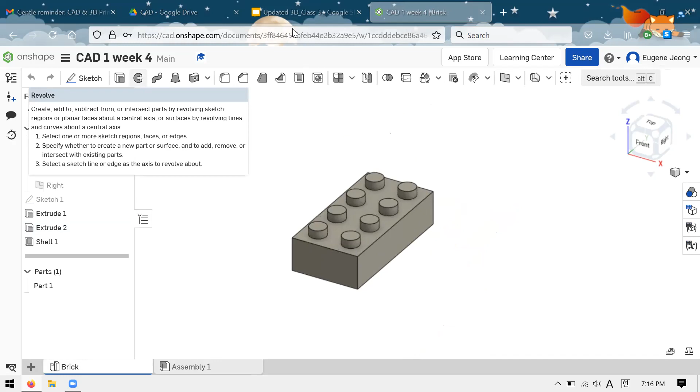All right, so in terms of last week, I think from what I remember, we went over the revolve tool. So that's the second one here. I think we'll be using it today, so when I get to that, I'll make sure to explain it pretty well.

The other thing was assemblies. We made this little brick together as a group demonstration, and we learned our first steps in making an assembly, including how to fasten things and fix your first part to the assembly space. The only thing we really touched on was the fasten mate. We'll also use that today, hopefully, depending on what we get through. So when we get to it, we'll get to it, and I'll make sure to take it slow.

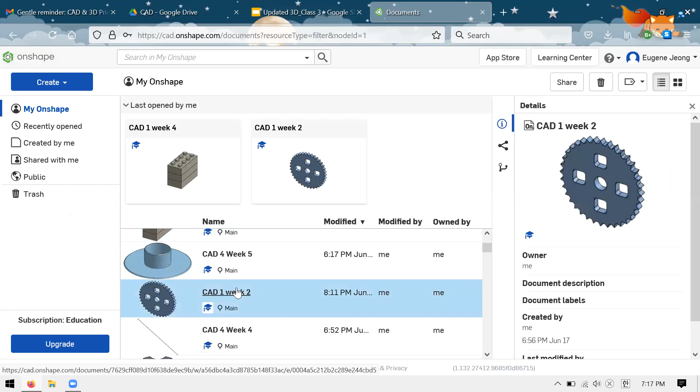Seems like this is everyone we're going to get, so let's get started. As I said last week, of these projects done in previous versions of this class, I believe this sprocket handle thing has been one of them, and quite conveniently, each of you hopefully have completed a sprocket from a previous week. So hopefully you still have this model. Let me know if you don't. I'm not really sure what you'd do without it, but we'll figure something out.

What I'll say is open up that Part Studio, that document where you had that sprocket made, and just start working. When we start doing stuff today, just create new Part Studios inside of this document, with the plus sign, create Part Studio, and make new parts all in this same place where the sprocket is. It'll make things a bit easier later on when we get to assembly, just to have the stuff we're assembling together in the same place.

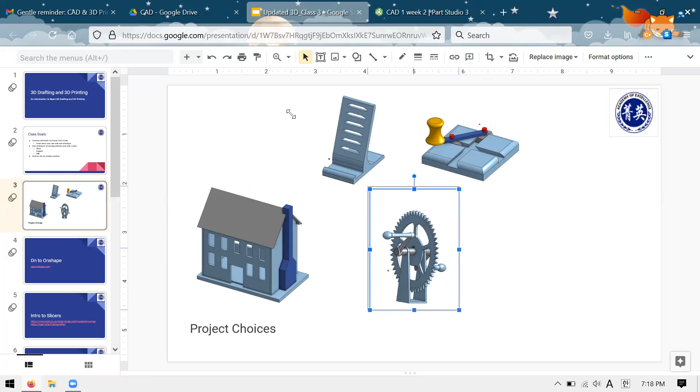All right, so hopefully you're all good now. So let's take a look at what the people who designed this sprocket stand were doing.

It's fine. Okay, so we just open a little text document here. I hope you can all see the notepad. In this case, we're not designing something entirely from scratch. We kind of have an idea of what we want, and that's a little stand for a sprocket with a handle that you can crank to turn the sprocket.

And our final goal is a model, something in the ballpark of this, where everything moves. You can click and drag on it to make it move, you can animate it, and that's kind of what we're working towards. So we know what we want, and so how do we get there?

So when we're modeling, we need to think about what we need to make. Every assembly is made up of parts, and so we know what parts we need. We can see them all here. I'll give you a second just to brainstorm what are the things we're going to have to design and model so that we can put it into an assembly.

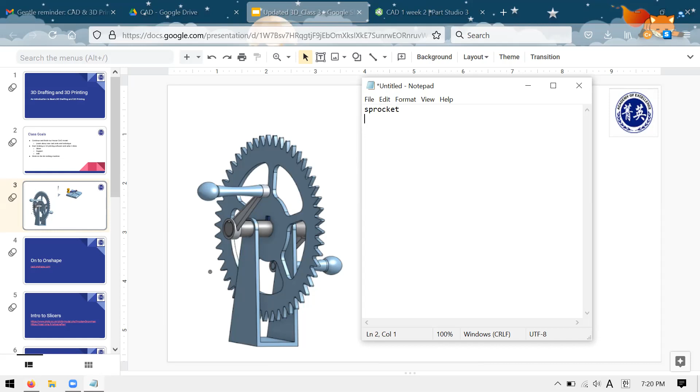So the first thing is the sprocket, so I'll just write that to begin with. What else do you see here? A spherish type thing—I might want you to be a bit more specific than that.

Which part are you referring to? The knob here? Okay, so like a handle, right? But you don't really hold onto that though. I guess it depends. But some kind of handle, I suppose, like a handle. Okay, what else do you see?

I see a stand kind of thing. Yeah, so this kind of U-shaped, the square thing that's supporting the sprocket, right? Yeah. Right. That's definitely there. Okay, what else do you see?

A cylinder that goes through the middle hole of the sprocket. Yeah, cylinder. We might call it an axle or a shaft or something along those lines. But we do need some probably cylindrical component that'll rotate and keep the sprocket on it.

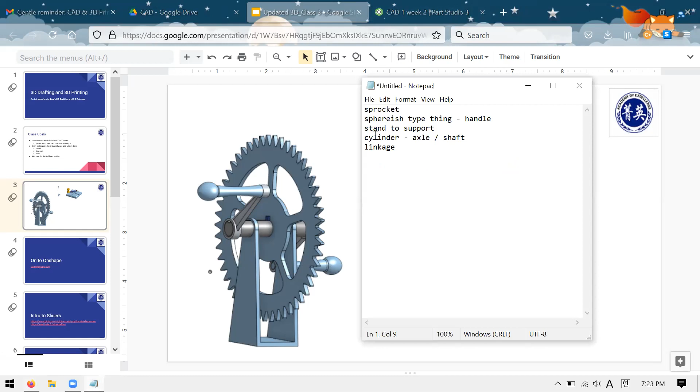So now we have a list of parts. We need perhaps 4 more things on top of the sprocket we already have. And so let's get started.

I'll start off by naming my part studio so I don't get confused. First one is the sprocket that we already have. Everyone already has. Next, I want an axle. How do you create a part studio?

Sorry, your voice cut out. How do you create a part studio? Right, so hopefully you're already inside of this document with your old sprocket in it. Yep. So in the bottom left corner, you'll see there's a plus sign. If you hover it, it says insert new element. And if you click on it, in the second group of items, the first option is to create a part studio. You can just click it and it'll take you there.

And to rename it, just right click on the tab in your bottom bar, and there's an option to rename it. So I'll go ahead and create all my part studios. Let's see, the stand, handle, and I want a linkage of some kind.

Before we start, as usual, I know I have an extra challenge for those of you who pick up things quickly and get bored. This time it won't be a different thing, it's just that I'll probably demonstrate a pretty simple version of each of these parts. If you want to increase the complexity, add some more details, you can see the linkage maybe - well, I thought it was pocketed, but that's just the lines on it. You might add some details there and so on. So that's what you can do.

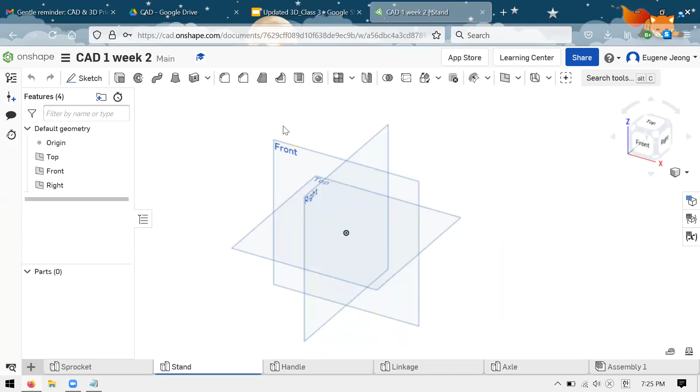If you really want to share your stand at the end of all this, I'll make some time at the end, but let's get started. So first things first, I need the stand, right?

I'll start off with the same question I asked before, like what shapes do you see, when you look at just the stand part that's holding up the axle? A triangle. Okay, someone says triangle. I'm imagining you refer to this part here, where it kind of tapers, yeah. So we do need to achieve that kind of taper somehow. And it's kind of a rectangle too. Yeah, when you look at it head on, like the upright parts here, you definitely see a rectangle going on.

And so given that, what would be a good way to start doing this? What 3D features might you use, of the ones we've learned, I suppose? Not too many: extrude, revolve, fillet, chamfer, shell.

No ideas. Wait, can a shell go through two sides? Like, can you shell both the front and the back? Yeah, so the shell can actually take multiple faces, which is pretty cool.

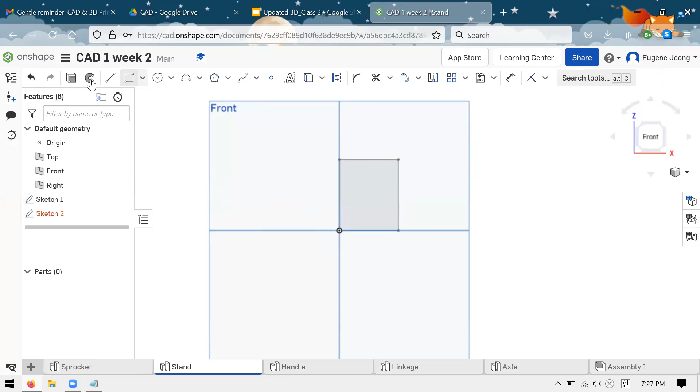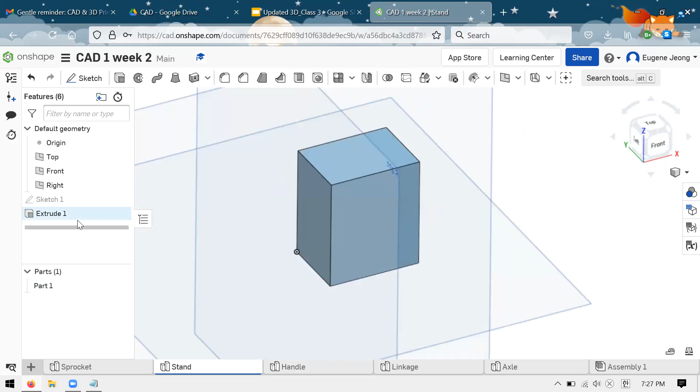So maybe that gives you an idea or two of something we can do. But I'm getting ahead of myself. So here's some ideas. As I go through these demos, you're free to try things on your own.

Try to make the thing beat me to it, if you will, or just follow along. Either way is fine. I'll start out by making a sketch, maybe in my front plane, and I'm going to start with this triangular shape someone suggested, this tapered face. My plan is to draw that in a sketch, extrude it out, and then maybe use a shell on this outer part just to make it hollow, and we'll see how it looks from there.

Start off with my line tool. I have a line, that's kind of the base, that's where the ground is.

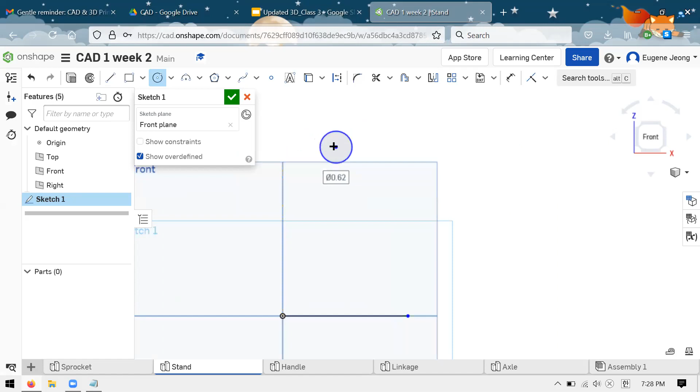I know I need a circle because that's where the axle goes through, and I probably want another circle, one for the inner diameter, one for the outer diameter. Then I'm going to have some lines, go something like that. Nothing's defined right now—everything's very unconstrained, underdefined, totally free to move, but the basic shape is there.

So now as we start to dimension things and define things, the question comes up: how big do I make it? Well, the answer to that is how big is my sprocket.

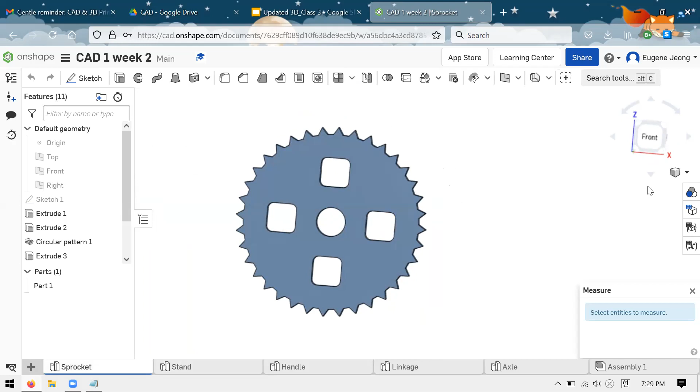I can go back here. If I want to find out how big something is, you can see in the bottom right there's a measure tool that looks like a tape measure. So I can do a simple point-to-point measurement like that, and it tells me the distance is 3 1/4 inches.

Another thing I could have done was just go into the sketch and look at the circles that I drew, and I can see that 3 1/4 inches is the maximum diameter of this thing.

So I need to make sure that my part will clear, right? I don't want the sprocket to be so big that it can't fit inside of the stand, and I don't want the stand to be so big that it looks silly. So I'll start off with the critical dimension that's relevant, which is kind of this one.

Again, if I ever do things too fast or you can't follow, just interrupt me, ask a question. I made a dimension like I've done before: I select the point that's the center of the circle, and I select this line, and I just drag it out to a vertical dimension.

The diameter of the sprocket was 3 1/4 inches, so maybe the total height can just be 2 inches and it'll look okay. It says on mine, 'an entity cannot be dimensioned to itself.'

So what you probably did was click the same thing twice. If I click something like that, you can see I get that error message. What I'd recommend is just deselect your tool, reselect it, try again. You have to be pretty careful with where you click, just because it can be finicky like that.

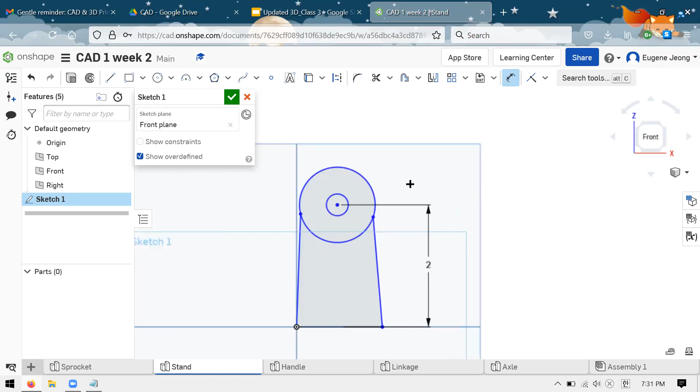Remember that your sprocket might be a completely different size than mine, so just measure yours, take a look at how big it is, and adjust your dimensions accordingly. Make something up—I'm not making a standardized, one-and-only stand here.

Next thing is I'm going to have this hole for the axle. So how big do I make that hole? Well, the sprocket already has a hole, so they should probably be the same size, just so the same axle can go through both of them.

Using the same process, I'll use my measuring tool. I can just select that face to measure it. I see that it's 1/2 inch in diameter. You should probably measure yours and see what your dimension should be.

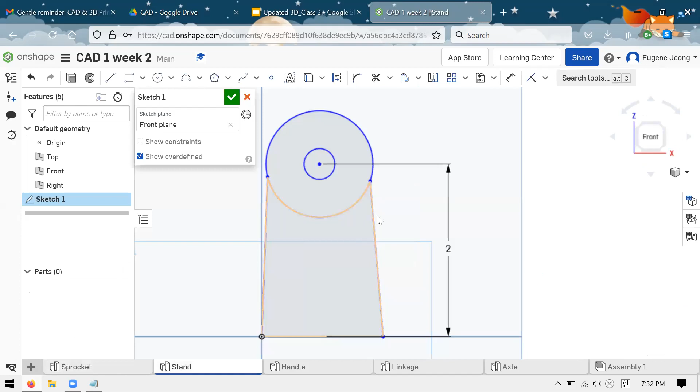Seems to be a bit of a thunderstorm where I am, so hopefully I don't have any problems with the internet.

So there's my dimension. If I think about what I'm doing here, those are pretty much the only critical dimensions. Everything else is free to be whatever I want, so I can do whatever I want now.

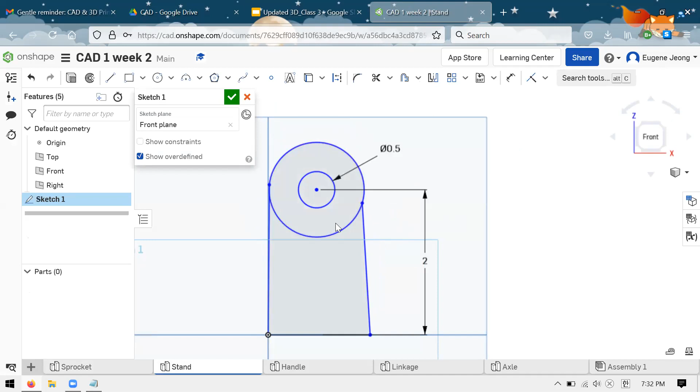As I start trying to dimension my sketch and fully define it, remember that my objective is to turn all of these blue entities, all these blue lines and such, black. A good way to figure out what's wrong, what I need to change, is to drag the blue things around and see what's still changing.

One of the first things I noticed is that this outer circle, the one I've highlighted, its size isn't fixed. So I can take care of that pretty quickly just by adding a number.

Okay, everything's still blue, so I'll drag some more blue stuff around and see what happens. I can see that the position of the center of the circle is not dimensioned yet. So I'll do that again with the dimension tool. I click a point, move my mouse over so that I get the dimension that I want.

Wonder what would look good. 0.75 maybe. Why not? We can change it later. You can see just like that, a lot of things turn black because these circles, now their sizes and their locations have been fully defined. So they turn black.

So what's left? I see these points are still blue. Let's see what freedom they still have. I can drag them around and you can see they can still move around the circle.

Well, what's my objective here? I kind of want the stand, yeah. I define the circles, but they're still not black. Are their positions defined? Yeah. Both horizontally and vertically? Oh, I forgot one. So whenever you run into that, try dragging the blue points around, and if it moves, it'll tell you kind of what's up.

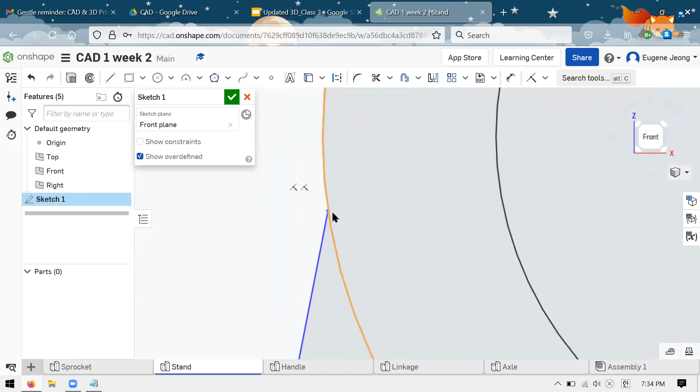My design intent here maybe is to have a smooth stand. So I don't want this sharp corner where the straight part turns into the round part. I kind of want a smooth transition. For that, I'll use my tangent constraint, and that just takes an arc and a line.

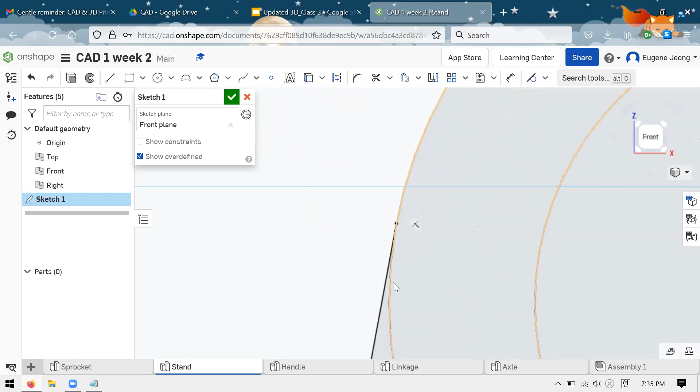You can see just by doing that, now it's a smooth transition. The straight line and the arc blend together. So that's good.

And I'm still not done. One more blue line. So let's try moving it around. I can see that the width of my base is not defined anymore. There's a few ways I can go about this too.

One thing I can do is just add a dimension to this bottom here, and that'll finish it. Another thing, maybe I don't want to think about what number I have to type there. My intent here is kind of to make this symmetrical when I look at it this way, right? For the left and right, I want it to be even.

So another thing I can do is just add a constraint. It can be an equal constraint and just make these two lines equal. Having done that, you can see everything is dimensioned, everything is defined. I'm pretty much done.

So I'll pause for a moment here just to see if you have any questions. I still can't get two lines to become black.

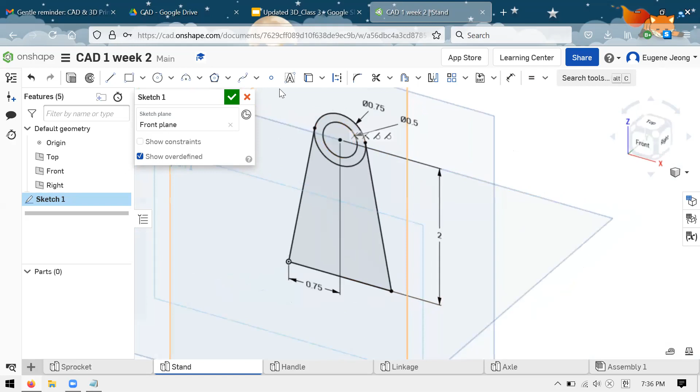Right, I see. Someone said something about the two lines. For those, it kind of depends on what you do. In my case, what I did was I created a tangent between the line and the circle, and I made the two lines equal to each other. Geometrically, that's enough to fully define it. I guess if you still have blue things, try dragging the blue things around and seeing what happens.

Someone's asking about the equal constraint, so I'll just show that again. I started out with the tangent one, just because my intent is for this junction to be smooth. The way tangent works is I select the tool, I select a circular arc, like a circle, and I select a line. So I select two things, this and this.

Then for the equal constraint, I select that, and I select two things that I want to be equal. So what I did there, I clicked the equal constraint, I clicked one of these lines, and I clicked the other line. If you still have a question, please ask again.

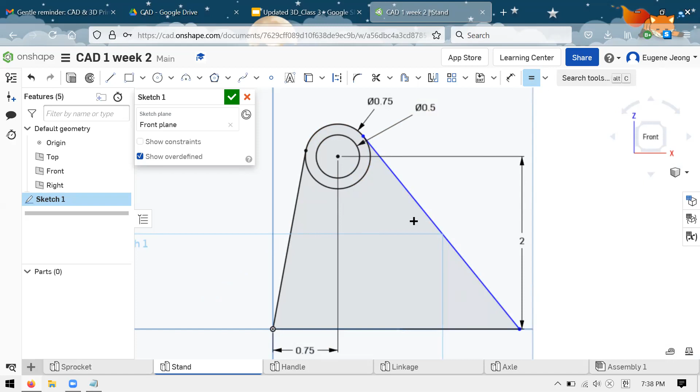So let's say I'm in a situation like this where my lines are not equal. I can select the tool, select a line, and select another line. So just select two things and that's how it goes. Can't get the equal to work.

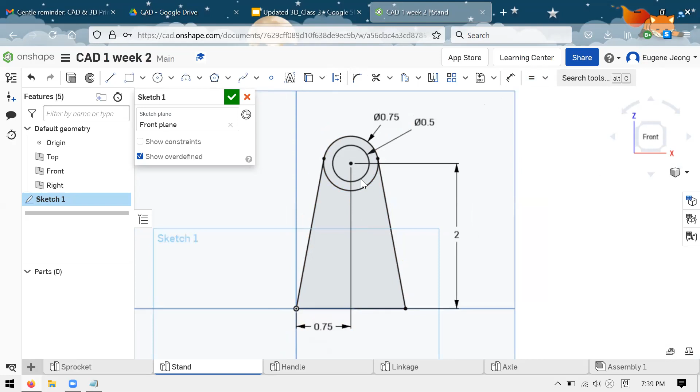I'd say drag things around, try to see if you can figure it out. I have a lot of faith that you're able to figure it out. For the moment, if you have a shape like this that's extrudable, just go ahead with the demo, just extrude it while it's still blue. And later on, when we take a pause, I can ask you to screen share.

And in the meantime, if you figure it out, that's great. So hopefully everyone has at least a shape, something like this, whether or not it's fully defined yet.

At this point, I'll resolve my sketch and I'll have my profile. So next thing I want to do is extrude it.

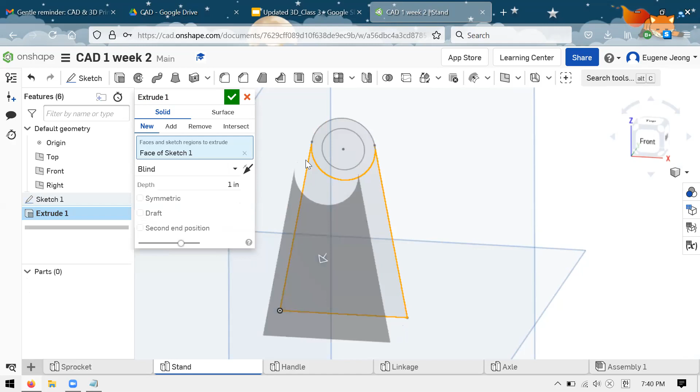So we've done this many times now. You select regions. In my case, due to the way that I made my sketch, I have kind of two regions that I want. I have this sort of trapezoid of sorts, and I have this.

So I select the regions I want. This is what I want as my shape. As for how deep to extrude it.

Again, I can see there is not much clearance issue there. It just needs to be thicker than the sprocket. So just to check how thick my sprocket is, it's 1/4 inch.

The entire thickness of the material of the stand and the sprocket thickness, and maybe a bit extra, is what I need. So perhaps I want like a 1/4 inch thick stand. In that case, it needs to be at least 3/4 of an inch. So I'll just round that up to an inch.

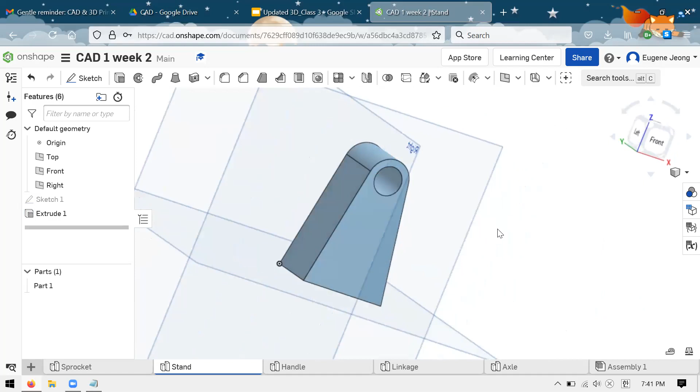So I have shaped something like this. Hopefully that part wasn't too bad. And the last thing I'll do is to cut away the middle part so that there's space for the sprocket to go inside. And so someone earlier suggested using the shell tool, which I believe we covered last week.

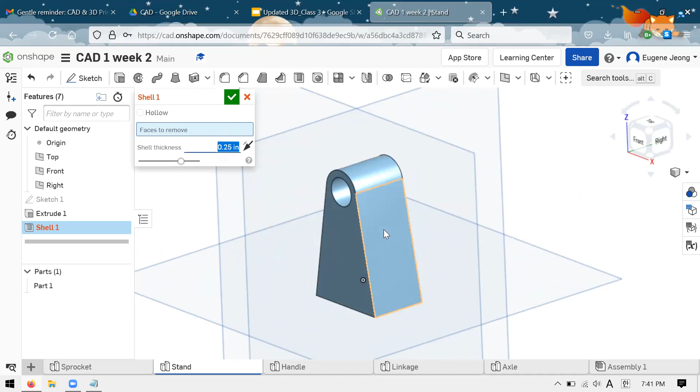And so for the thickness, in my mind, I was thinking a 1/4 inch. It's the same thickness as the sprocket. And for the faces, I'll just select...

And now you can see something unexpected happens. I thought it would just open up like this, but when you think about it, this hole actually creates another restriction where you can't actually break into that without breaking into the wall, which is how the shell tool works.

And so that's a pretty simple fix. All I have to do is go back into my extrusion.

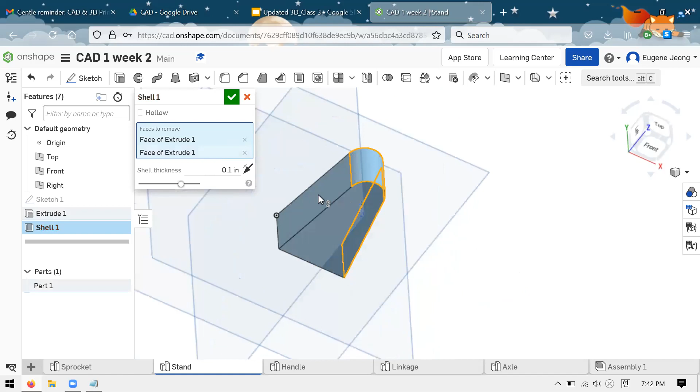And I actually want to also extrude this part. And now that that hole is out of the way, hopefully it'll just let me shell like that. And it does, so that's great. I'll bump the thickness up to 1/4 inch again.

And I can put the hole back in just by doing another extrusion. So to do that, I'll reveal the sketch using the eye, which we've talked about. And I can create an extrusion, select this circle, change the type from add to remove.

So I don't remember if we've shown this explicitly. I think we have for the sprocket. So you should be familiar with that. And just to be safe, I'll make it through all.

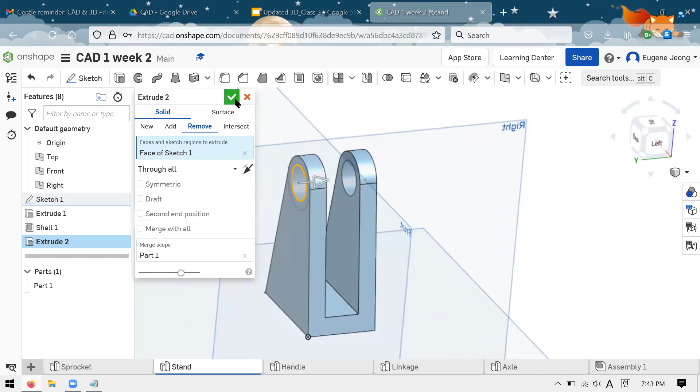How did I extrude the hole? So are you able to see your sketch that you drew that has that circle in it? I know someone before had a problem where they were looking at it through the part, so it looked like these dashed lines. So you might not be able to select it if you do that, but turn it around so that you see solid lines on your sketch and not like the dashed lines.

Then you get your extrude tool. You want to change the second bar here from new or add to remove. So you need to have this set to remove. You select the circle. You can see by default, it kind of tries to go into the positive direction.

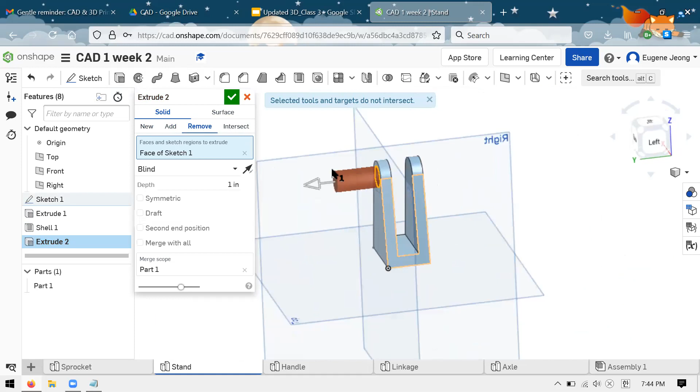So I'll flip it using this arrow, the opposite direction arrow. And by default, it happens to pass through the whole thing, but this is, I guess, optional. I'll change it to like something like up to next or through all.

And that's just in case I update it later to be even wider. So hopefully that worked. If that worked, please let me know.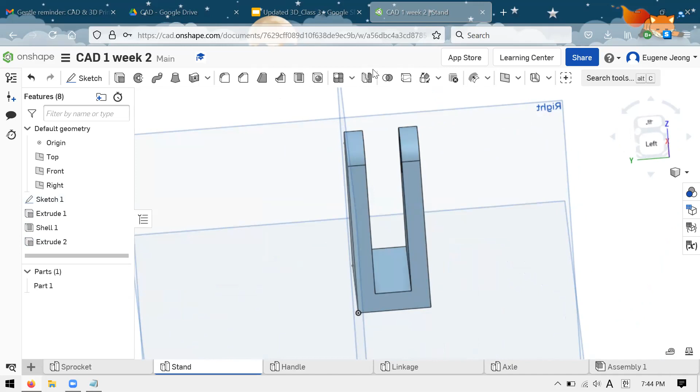I'll hide my sketch again. So for those of you who weren't able to create this first sketch and fully dimension it, I guess right now I'll quickly take a look. Whoever it was, share your screen please, if you still have the problem. If you don't, also let me know. Great, I believed in you all along.

So this is our stand pretty much done now. Looking at it now, it does seem a bit thick, so maybe I'll change the shell to be a bit thinner. Maybe I like that a bit better in terms of proportions, and I can always change it thanks to our parametric modeling. So that's the stand.

Next, let's go for maybe something more interesting, the handle. Someone referred to this as the sphere thing. We do want to have this kind of interesting shape, right? It's pretty cool geometry. You see this in real life with crank handles, maybe on a lathe or similar application. We want those ergonomics, right? So someone referred to this as like a sphere thing.

So what features might you use to try to create this handle shape? Which of these tools would be well suited to create it?

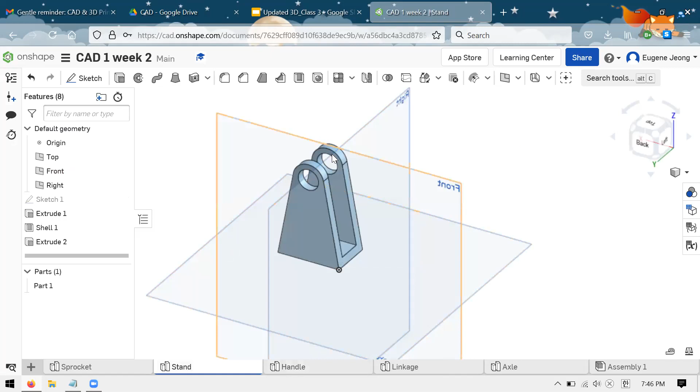One more question about the stand. How did you get the holes in? I tried to do the extrude, but it didn't work. Are you talking about these holes?

Yeah, so if you're doing the extrude cut, common things that might be happening: make sure you change this option to remove, make sure the direction of the extrusion is correct, so it actually goes through the part rather than into nowhere. And make sure the extent is far enough. Through all will pretty much always work. If it's blind, maybe it's too short, you might not see anything if you do something like that. So make sure it's through all. Merge scope should be part 1, that should be selected by default. Okay, did that work?

Great. So would you like to answer my question on how you would create this handle? I guess you were not here when we talked about a tool that would be very helpful for this. Well, I see next on my Zoom interface there is Tony. Would you like to volunteer?

What would you use to make this handle?

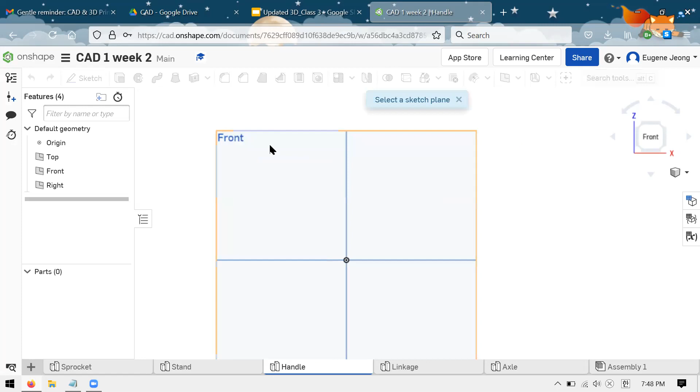Revolve, maybe. Great, what a great answer, that is my exact thought. And someone says fillet, and that'll also come into play. It's a very satisfying, very smooth shape, so that should be fun to make.

So I'll start off maybe with a circle. I know at the beginning someone called it like a sphere thing, so what better way to start than a circle. I'll draw something just like that.

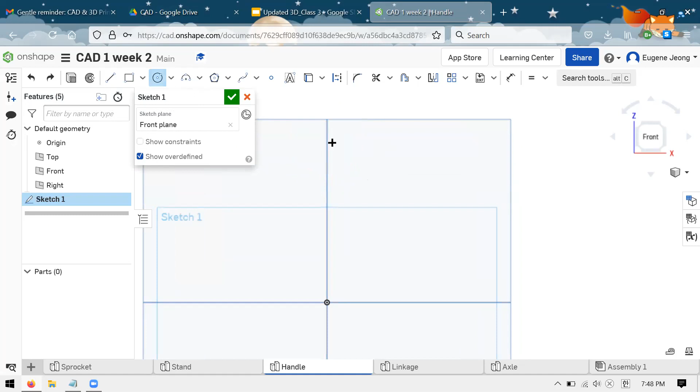Maybe that was a bit quick, but what I do by habit is just hover over so I get my constraints. You can see the vertical thing shows up and the origin highlights when I hover.

But also I'm going to need an axis of revolution, so I might as well make that too. I want a vertical line, that'll be my revolution axis. And I want a circle.

To be kind of the tip of my handle. And then let's look what we have here. It's very interesting, kind of tapers towards the middle and then comes out on both ends. So at the base, I can imagine I kind of need a bit of material there, maybe between these two.

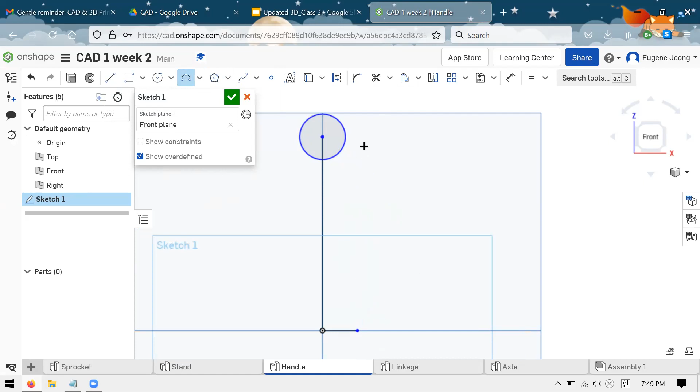I might try to use this arc tool. I think I showed this in one of the first classes, but we may not have had the occasion to use it, so now we do. You can also use any of these types of arcs, but I'll go with the 3-point arc. The way the 3-point arc works is you select a starting point, you select an ending point. You can see I missed my ending point.

So I'll try again, and I pick a 3rd point that's on the arc. I'll just click somewhere in the middle. You can see this is kind of the shape that I've got going.

And with this, I'll just start dimensioning, keeping in mind that my whole sprocket is 3¼ inches in diameter. Maybe a nice proportioned length for this would be, say, like an inch. So I'll just go through, do the same thing I used before.

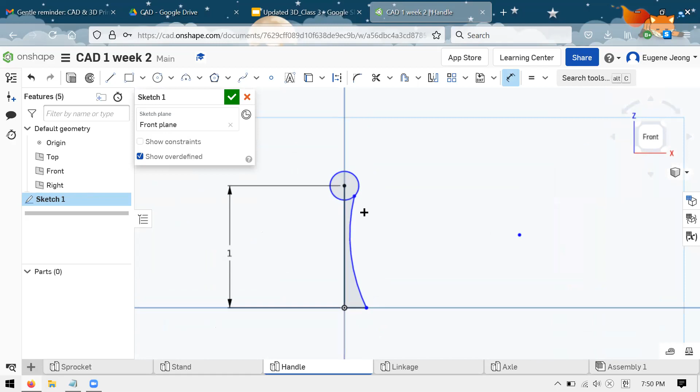That same issue where this arc naturally tends to just create a sharp angle. So to get rid of that, I'll use my tangent constraint again. And surprise, it also works with 2 circular arcs. Very convenient.

You can see it's still blue. Let's see what's wrong. I can see it's kind of the radius of the curvature that's not defined. So I'll just select that arc as my dimension. And you can see, having done that, everything turns black.

So a couple of tools that we haven't used much, but hopefully still straightforward. Once you're there, resolve the sketch. If you're not quite done, but you have the general shape, it's fine to just leave it underdefined for now. And you can always go back and think about it.

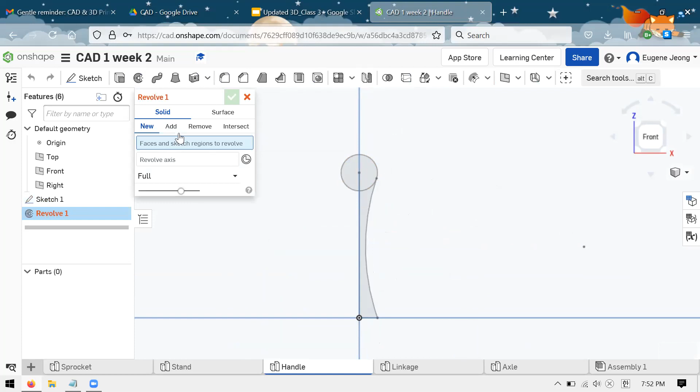So this is the new tool that we talked about last week, for those of you who were absent. It's called Revolve, and you'll see what it does when I do it. But it needs 2 inputs, essentially. One is the region to revolve, similar to the extrude, where you're selecting an area that you sketched out. The second thing is the revolve axis. What the revolve does is it sweeps a profile about a line. And hopefully it works.

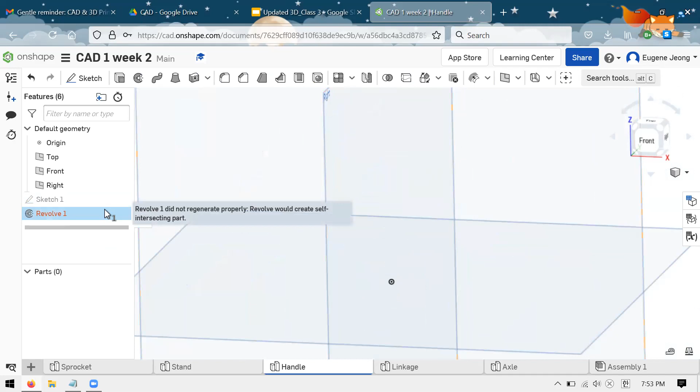Unfortunately, it does not work. And I expect that's probably because the profile kind of goes through itself. Yeah, that's what it's saying. So as usual, we're gonna have to make some changes on the fly. This should be a pretty easy fix though. Since the profile would have been self-intersecting, all I have to do is close off this profile. You can imagine what Onshape might not have liked is, as it was trying to generate this model, it had this other half of the sphere that it was kind of trying to push through itself. So all I did was add this segment here, which will close this out, make it a separate profile.

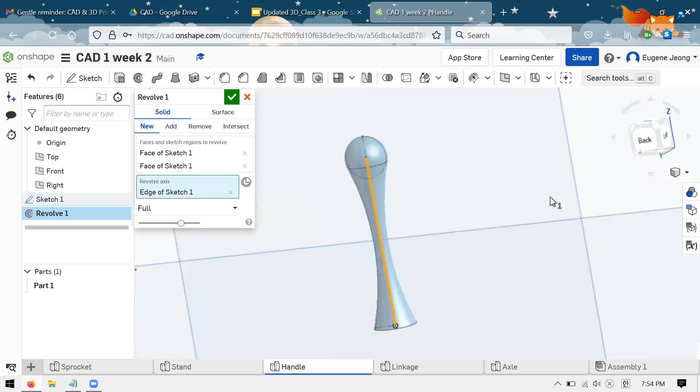And hopefully with that, Onshape will allow me to do what I want. There we go. So thankfully, now we're good. And for those of you who are seeing Revolve for the first time, hopefully this gives you an idea of what it does. You take a profile and you spin it around, and the enclosed area, the enclosed volume is what becomes your part. So you can still see my sketch in the middle there. It kind of just sweeps around. And there you go, that's my handle. It's a bit thin towards the middle there.

If I don't like that. Can you show me how to do it again? I didn't get that. Yeah, the Revolve tool.

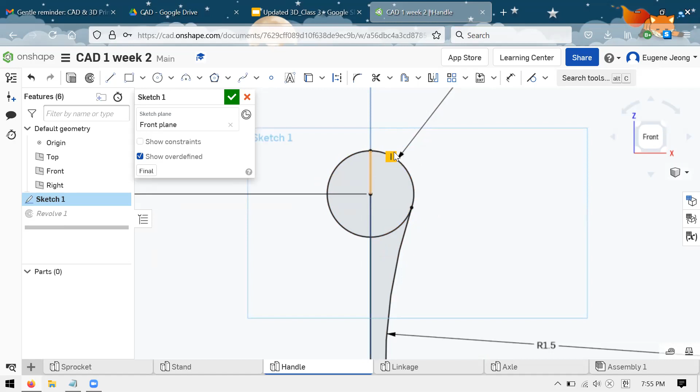So make sure you partition your sketch, I mean, like with the circle. Your voice cuts out, but I'm gonna guess you're talking about the sketch. Yeah, all I did was add a line. So from here to here, I closed off half of the profile by drawing a line, a vertical line to be clear. It has to be vertical, and they'll close off your profile. And unfortunately, Onshape forgot that I wanted that profile. Just remind it. But there you go.

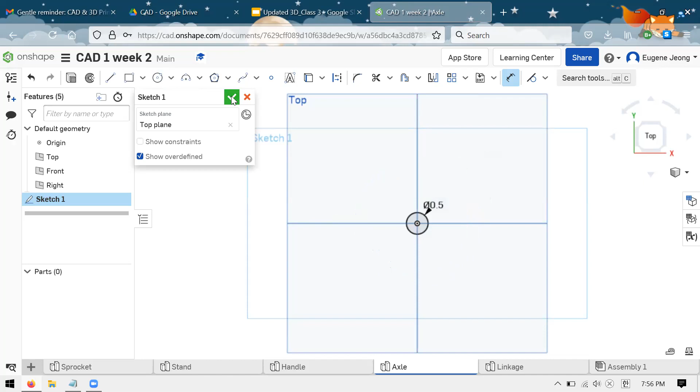So the next thing we're going to need, I think, would make sense, is the axle. This should hopefully be extremely fast. As someone pointed out, it's just a cylinder. So all we need to know is the diameter here, which I've already measured. It's 0.5 for me. So I'm just going to make a cylinder, which you may all be familiar with. I draw a circle, give it a dimension, and I extrude it.

And how long should I make this thing? Well, let me go back to my stand. How wide is the stand? From here to here, Onshape says it is 1 inch. So I do want it to be a bit longer than that, to come out a bit. Maybe I'll make it 1 3/4.

Maybe even 2 inches. But the axle should be very straightforward.

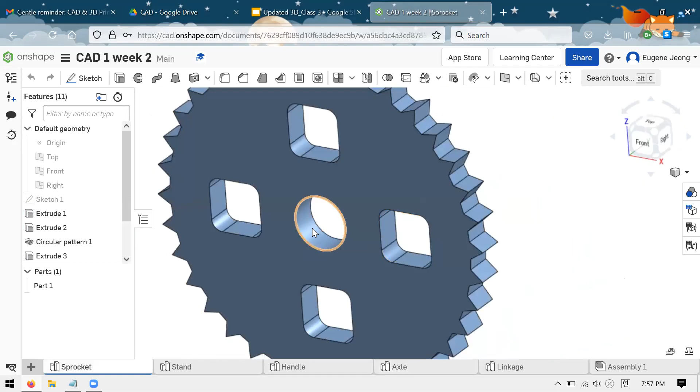These circles for the axle should be the same diameter as the inside of your sprocket, so it fits nicely inside. In my case this was 1/2 inch, but yours might be different.

All right, last part. Let's see if we can get through this in class.

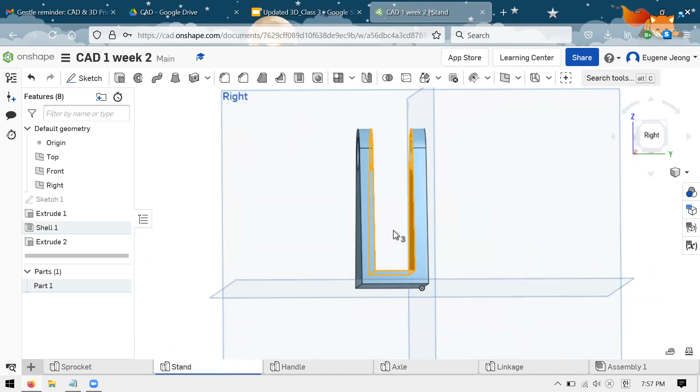Wait, I have a question about the stand. Sure. So on my stand, where the sprocket should go, there's something blocking it, like the two circles at the top, there's like a cylinder thing. Okay, I think that's the problem I ran into as well.

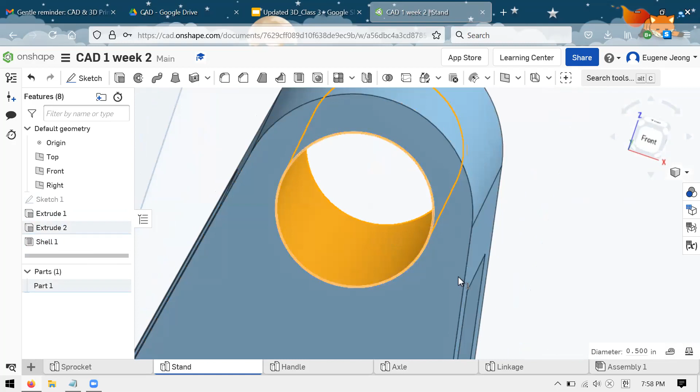To explain what's happening, I think something like this is what you mean. Yeah, I tried shelling the top but it didn't work. The way the shell tool works is it digs into the material until it reaches a minimum wall thickness, then does whatever it can to preserve that. So if you have the hole first, OnShape needs to preserve a wall thickness relative to that hole, meaning it has to preserve wall thickness even at the bottom, so it won't shell that.

The way to get around that is in your first extrusion, also extrude that hole out so it's a solid block. Then you shell it, and since the holes aren't there, it'll let you shell the whole thing out. Then you can extrude the hole again using what you probably already know how to do.

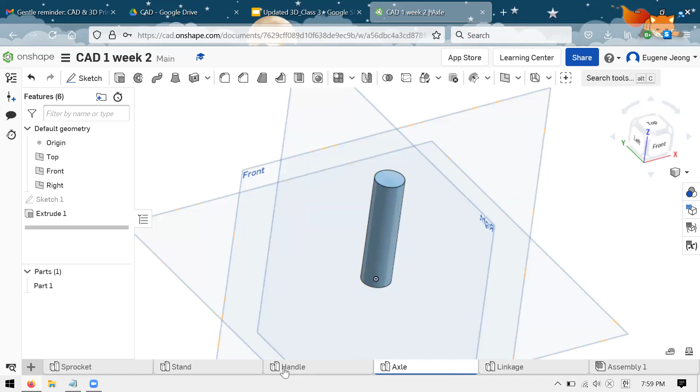See the chat. When I did the revolve, your thing disappeared. That probably means it hasn't resolved, so it'll fail, it'll turn red when you try to click the check mark. Did you make sure you did not select the self-intersecting region?

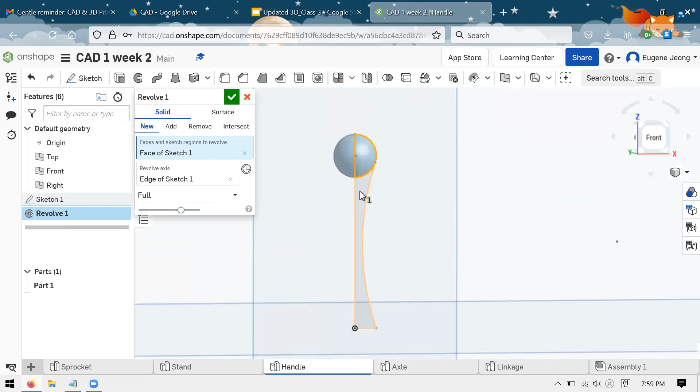For the revolve, make sure you're just selecting half of it. So don't select this, don't select that one, but only select these two.

For the stand, you can't extrude the empty hole. Are you talking about the axle? I'm guessing. Common issues could be: make sure it's set to remove, and make sure you're clicking the sketch from the correct side.

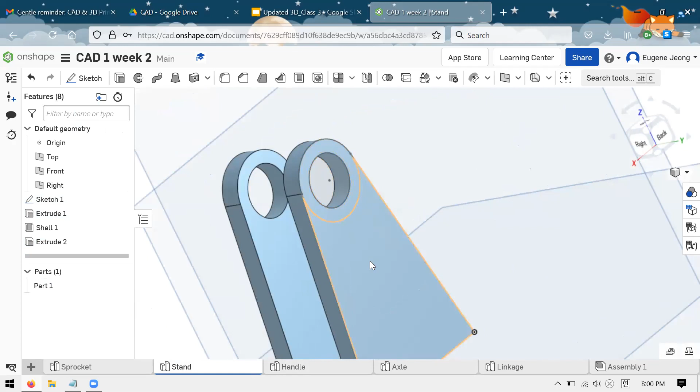You can see when the sketch is made visible. On this side, I can actually see the sketch with solid lines. If I'm looking at it from behind, or through something, it's a dashed line, so I can't select it. And you fill the hole to fix the shell.

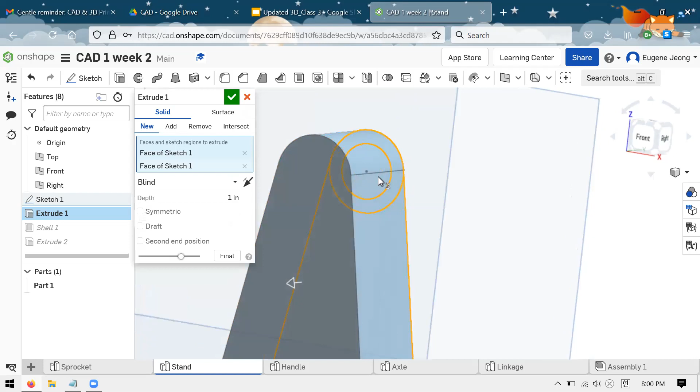Oh okay, so you might be back here, and you're saying you can't select that region. I can't imagine - it's almost certainly going to be a sketch region just because it's a circle. So try clicking on it, it might take a second to register. Just make sure to click on all 2 regions. Okay, cool.

I'm not sure what you mean by it's not letting you click on the arc. If it's an issue with fully dimensioning the sketch, just don't worry about it for now. I'd rather you get through to the next parts and we can work through dimensioning stuff later. If you have something that looks like this, that's all you really need.

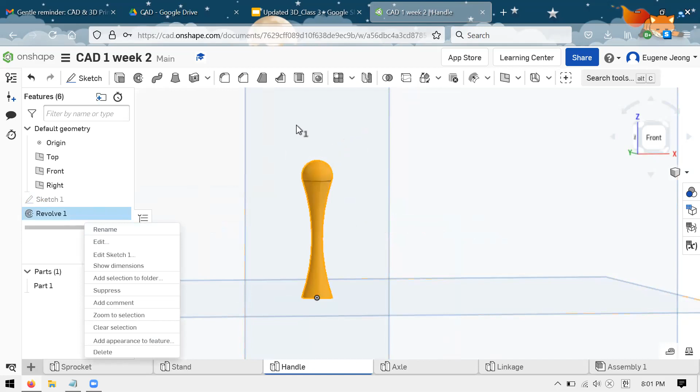It won't let me click on the arc in the revolve, like selecting it. So what you're trying to do is select a profile rather than a line - you don't want to click on the arc, but rather on the region, the semicircle so to speak. You do want to click on this, and if you just click that, you'll get a sphere.

Oh, it still disappears when I do it, and I put the line in too. Is it only selecting half of the circle, like when you highlight it here? Yeah. Did you select your edge? Did you select the correct revolve axis? It should just be that vertical line through the center.

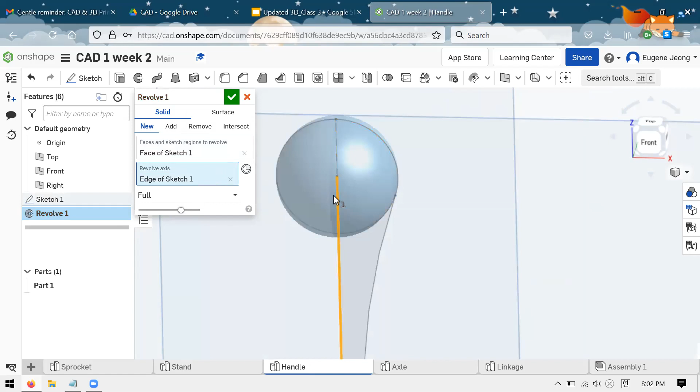Yeah, it's right, so this might be an issue where it does matter. You need to make sure the axis is actually vertical, just because of the way we made the sketch. Maybe that's not the issue though - if you have a revolve axis selected and all the profiles are both closed and all on one side of the axis, then it should work.

I might just take a look, do you want a screen share? Oops, hold on. It's like - when I click on this side and then click the check mark, it disappears. So open up that revolve again.

Can you deselect your parameters? Just click the little X's in the boxes, the other one too, just to make sure we pick the right things.

Right, so I see what you did there. Your revolve axis was the arc, but you want to pick the vertical line as your revolve axis. Select your profiles by clicking to change your parameters to faces and sketch regions. Right now you're on revolve axis, so click on faces and sketch regions to revolve. It's the box right above that one.

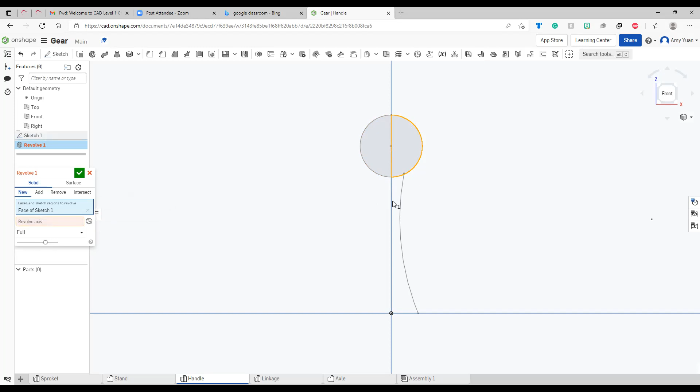Okay, can you let me screen share again? So what you have going on, make sure your sketch has this line here, and make sure you have this line here. It seems like you didn't close this bottom profile.

Okay, that's the first thing. The second thing is for your revolve axis, you seem to have selected this arc, which Onshape takes, but it's probably not an acceptable arc because it's not straight. So you need to pick this vertical line as your revolve axis.

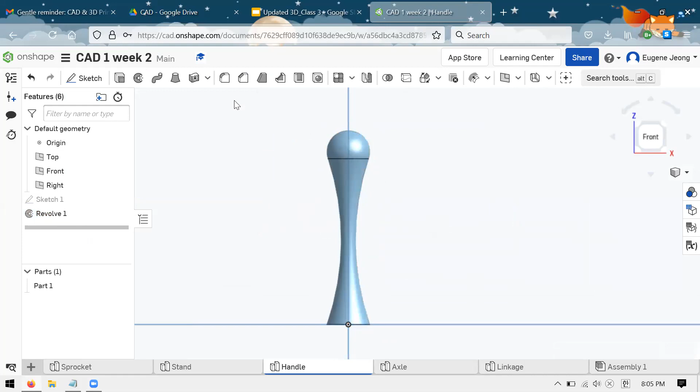And that's because you're revolving it around — it's like spinning it on a spit, and that spit is your line. So I'll let you work through that.

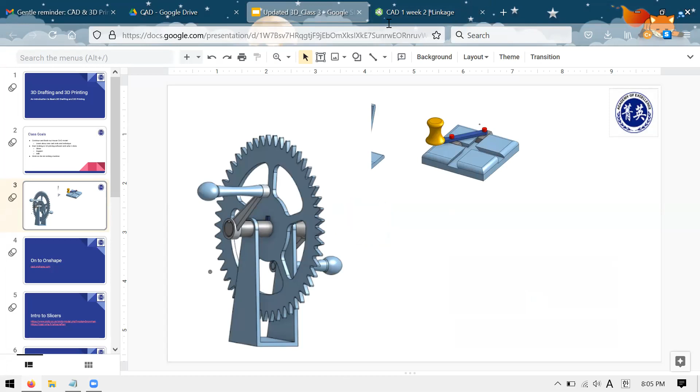Last thing we need is this linkage here. So all this is like a bar with 2 circles at the ends of it. I'll just quickly sketch that out.

I'll start out with 2 circles that are vertical with respect to each other. I know one of them is going to have to go over the axle, so I might make that the bottom one. So this is the essential shape, something like that.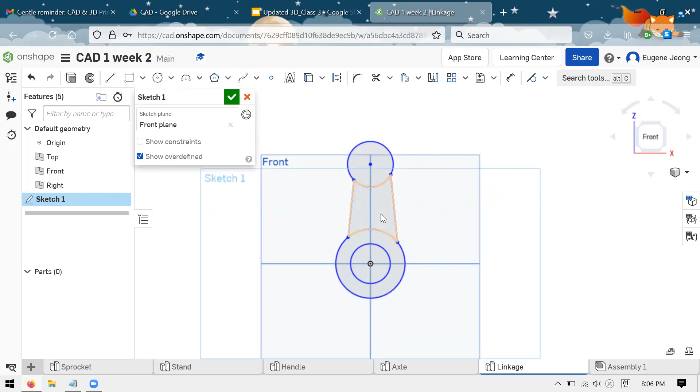As you've been doing, just go through and dimension these. For the inner diameter hole, make it the same diameter you've been using for your axle, the sprocket inner diameter — in my case, 1/2 inch. For the outer diameter, it can be anything.

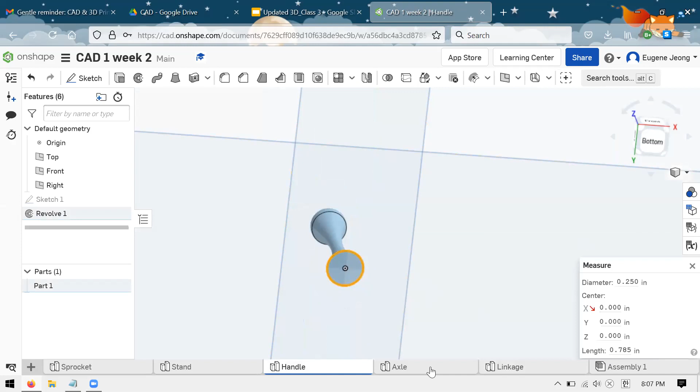For this top circle, I want it to pair up well with my handle, so here I have a certain diameter. Try to measure what it is — it's 1/4 inch in my case. So up here, I'll make it the same.

For the total length of it, I know my handle is maybe 1 to 1.25 inches, maybe 1 1/8 long, so I'll just keep the proportions. I guess this whole thing isn't going to look very proportional at all — mine will look a bit silly, but that's how it is.

So yeah, last class we did go over a few revolve examples. Might be worth watching that one if it's posted — should be on the Google Classroom. It also goes over the beginning of the assembly stuff.

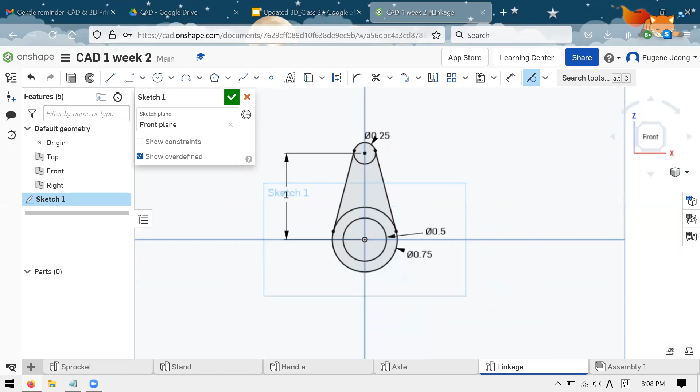Unfortunately it looks like the time's running a bit late, so we might not get to assembling this thing today, but that's also fine. Just next week, be ready to assemble all of this, but hopefully we can finish the last part, which is this linkage.

So I put together a pretty quick sketch there. I know some of you probably have made it, maybe not. Essentially it's just a few circles and some tangent lines.

All right, there we go. For the sake of simplicity, I'll just do a simple extrusion and call it a day. At this point, I'm pretty much done with all my parts.

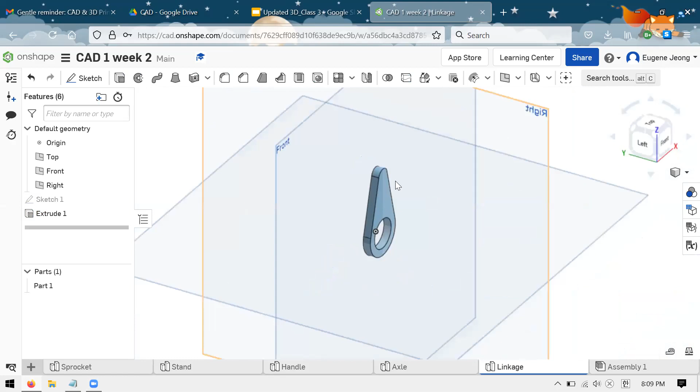With the time we have, I'm not sure if it's worth starting to put things into the assembly. I guess I might go over the very basics for those of you who missed it, but I'll pause just for those of you who still have questions on the 4 new parts that we created today.

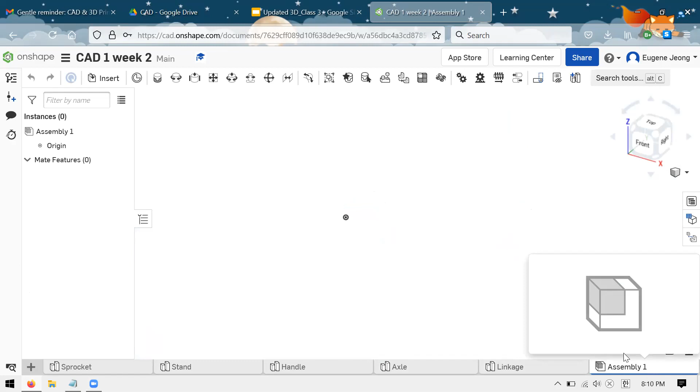All right, if not, I guess a quick crash course on assemblies. If you look at the bottom, by default you'll have a tab called assembly — it's in the same place as all your part studios. If it doesn't exist for some reason, go in here the same way you create a part studio, and you can create an assembly; it's the second option in this second group. When you go into it, you'll see different tools, things look different. I still have an analog to my feature tree — it's called mate features.

And all of these are my mates. So...

The way you put things into the assembly is just like you start a part with a sketch, you start assemblies with parts. You have your insert tool in the top left, and by default it'll look for parts in the same document. That's why I had you do all of this in the same document as the original sprocket. That's because it's really easy now to see everything I made here. If you didn't do that, there is a way to still find it in other documents, but it's a bit more involved, so hopefully no one has that issue.

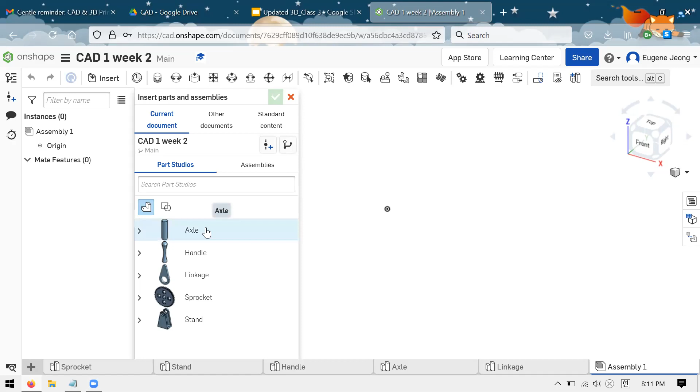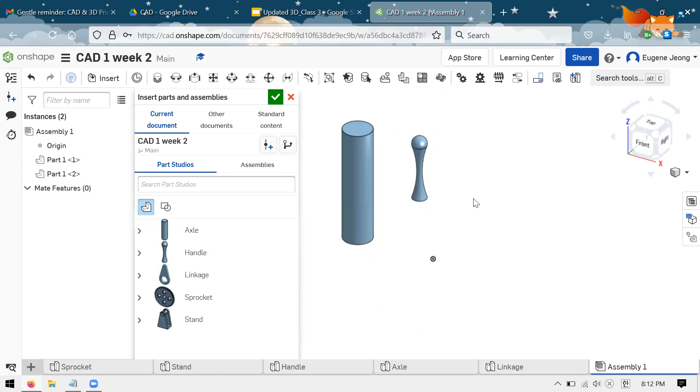The way you insert parts, as we went over before, when you're in this insert menu, you click on a part to select it, and Onshape will bring it into this assembly space for you. It'll follow your mouse. All I do is click once, and that brings it in. I want one of each of these parts, so I'll do the same thing: click and place, click and place. It's really when I start putting things into assemblies where I can see multiple parts side by side that you start getting a sense for the scale.

So already I'm seeing that this is a bit ridiculous. The handle looks really small. The linkage and the axle look really big, but that's how it is sometimes. Hopefully the stand looks about the right size, which is reasonable—might be on the small side. Yeah, actually very close.

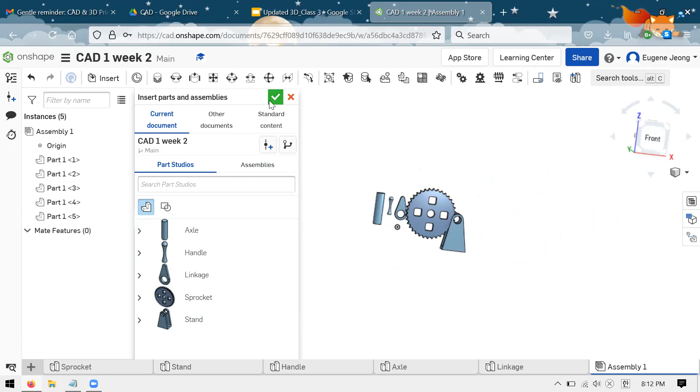But that's fine. Once you bring all the parts you want into the assembly, just like that, click and click, you want to click this green check mark, and that will resolve that whole interaction. Now my parts are all in the assembly together. You can see them, and you can also see that I can freely move them around. So none of them are constrained. None of them have any relative motion with respect to each other. They can just do whatever they want, go anywhere, do anything.

So, I guess over the next week, for those of you who have already had some practice with assemblies, maybe you want to challenge yourself and just assemble this on your own—go for it. You might have to look up how some of these mates work, but there's a lot of information out there if you just search for something like Onshape Revolute mate. There's probably illustrated guides and videos on how to use them. So for the curious, for the bold, that is an option.

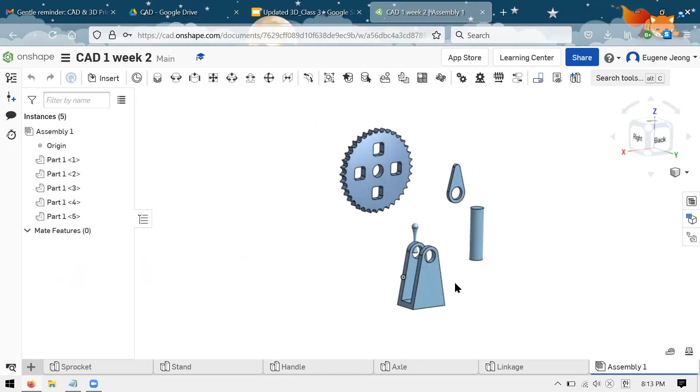But next class, when we get back, I'll probably start off just by assembling this together. And for those of you who missed last class, maybe take a look at that part just to see how the fasten mate works and how mate connectors work.

By the plan for next week, I was probably going to try doing this kinematic machine here. We might still do that next class, and at some point we'll talk about 3D printers and slicers. But this is only week 5—I guess it's already week 5, I believe.

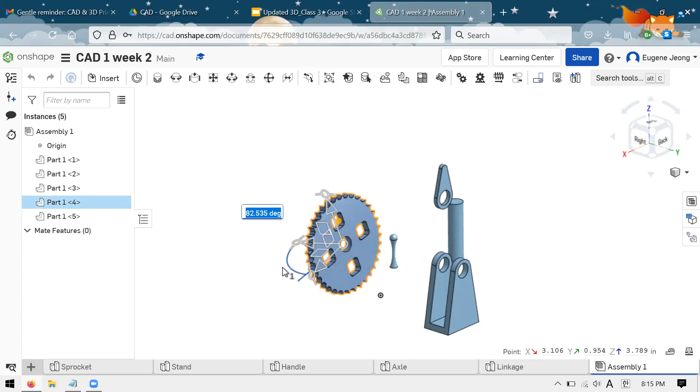If you click on them once, you'll have this motion tree of sorts pop up. We saw a similar kind of motion tree when we were doing sketch features, and it works the same way. You can drag things around with these arrows. You can also rotate them using these little handles. It's being a bit finicky—you might have to type in a number.

So you do have complete control over how to move them, but you probably want to create a mate, which is a more exact definition of how things move relative to each other. Not to spoil it too much, but it's going to be a revolute mate for at least one of them.